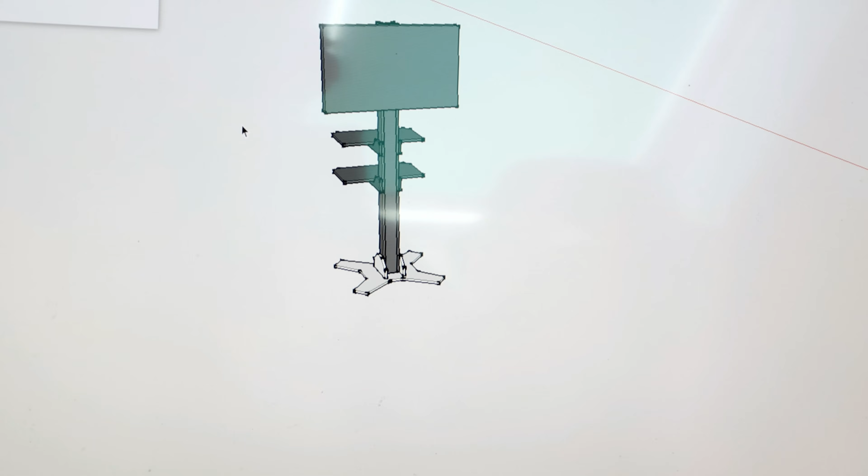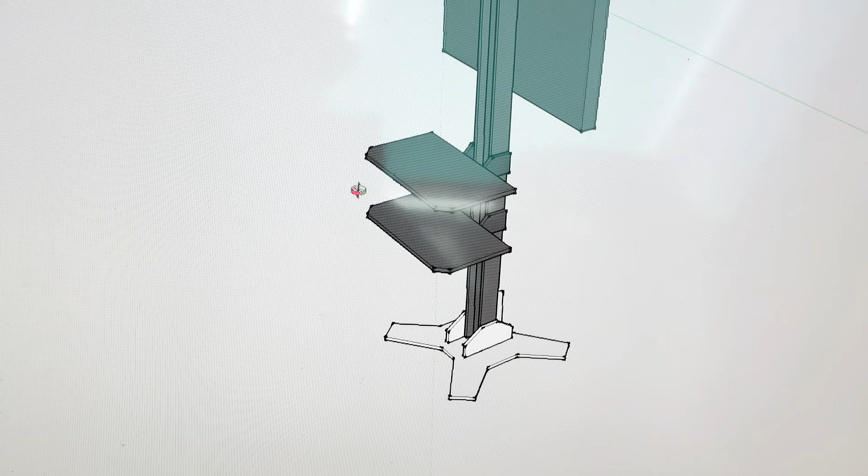Yesterday I was up until very late to get this finished. This is my sketch for the TV stand, and as you can see, I have a base plate that is not completely square because I wanted a bit more features on it. Then it progresses up into this large stand, or pole, where the TV is mounted on top, raised above the track at a good height, and behind it there are 2 shelves: the top one for a laptop, and the second one for the control unit for the slot car track, including the power supply, so it's easy access to changing the voltage on the track and getting access to all of the wires.

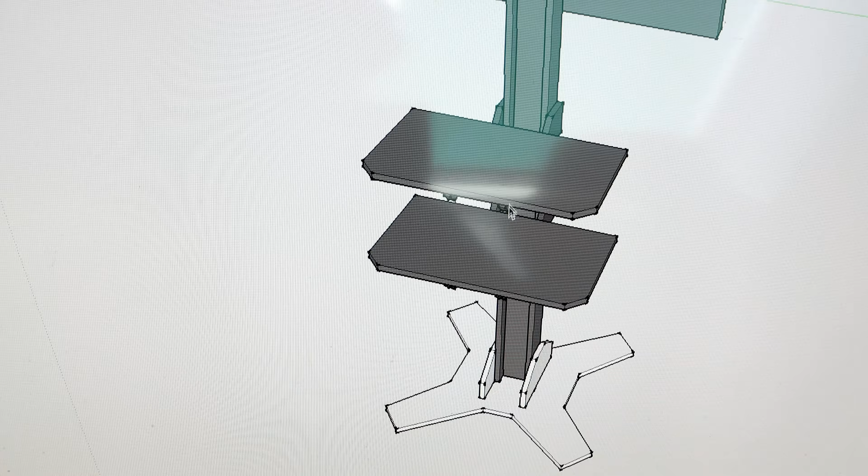All wires can be run down through this pole here in the middle and then down below, and I'm probably going to make a hole in here so I can run them out in front too. So that's the look of it, the general idea.

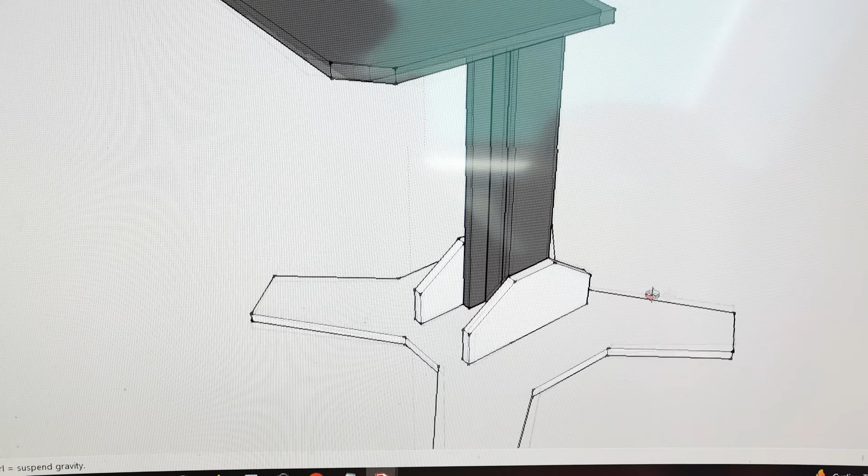I think it might be a bit too tall on this design, but this area here is going to be covered up so you can't see it, so it will be hidden. It will look a bit better. I'm going to do something like this, a small cover plate here.

I will probably leave the hole below it, the hole right there, because that way I can run wires out this way, and the same here. So the wires here will go in front or down below the track.

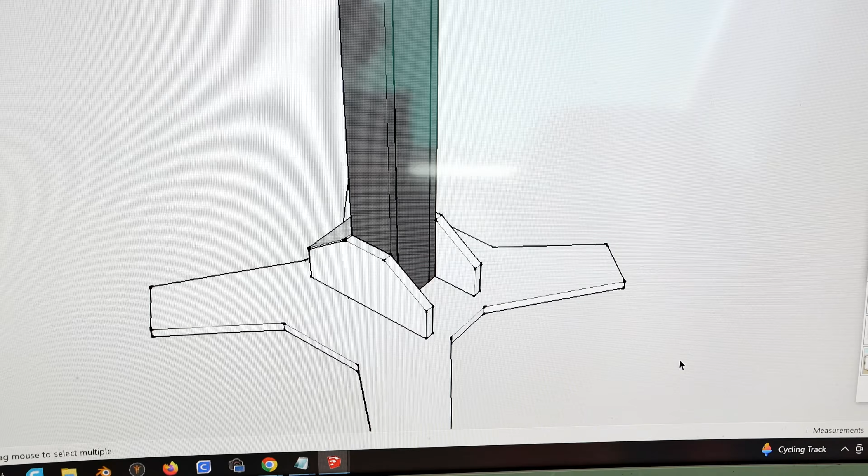So that will actually be pretty cool, that the wires could run all the way down this one, and then out through a hole in the bottom, and then out here, so they can get to the track as unnoticed as possible. So let's get this built.

It's going quite nicely with the TV stand, and sorry for the poor light in here. It is getting very dark outside. I think there is a storm coming, and I have no artificial light in this room, so I am relying on the sun. So it doesn't get any better than this, so nothing to do about it anyways.

But the TV stand is right over there behind, and right now it's just sort of like a pillar you can attach a television to. We have the bottom down here.

I am going to do a bit more work on that to make it look better, and then it's going up on some legs, just some very short ones that will keep it on the floor but raise it a bit. So I still need to drill some holes in it so I can run wires through, and I'm going to make those shelves.

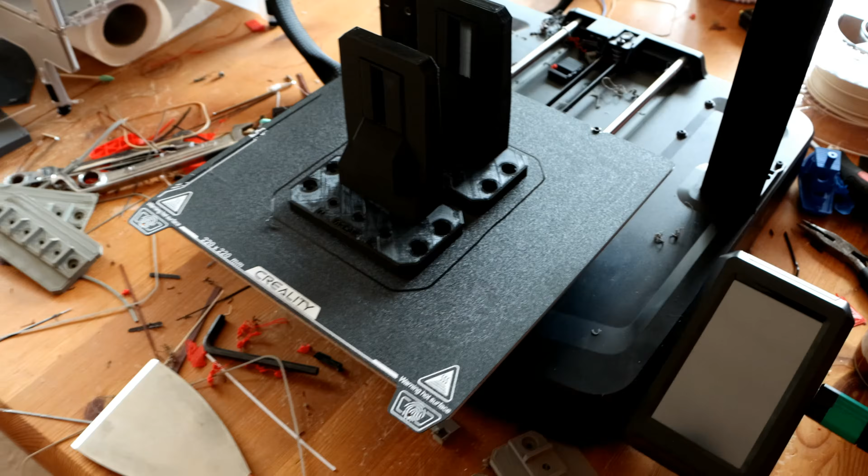Before I went to bed yesterday, I started this 3D printer so it could get these printed by today. This is the mounts for the controllers, and they're going to be located on the side of the track. Luckily the printer hasn't made any fails or flaws here, so they look just perfect.

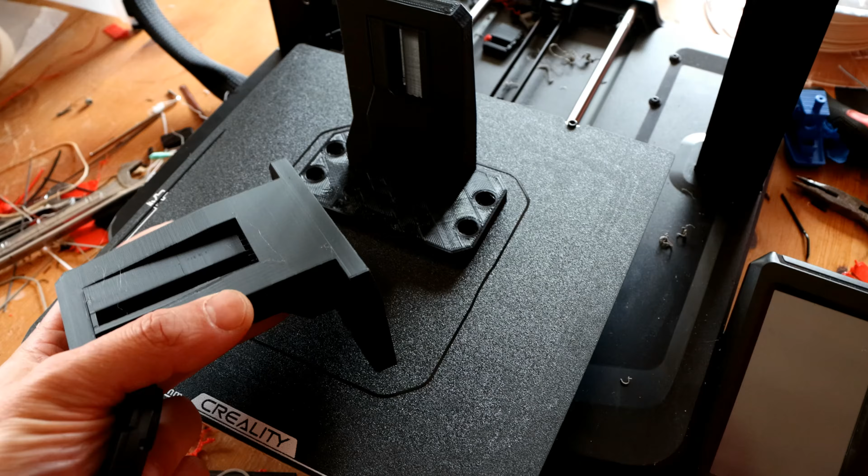So this will be popped out, and then we can install the controller here, and it will be connected through these holes. Yeah, I'll run bolts through them like I did with the control box. And this is mounting holes for screws.

I'm working on connecting all of the wires now, and I have these that are for holding the controller, so they can just fit right in here. And if we take a look at this one, we can see that the wires will be connected behind it and then run through a hole in the track here, so everything will be hidden.

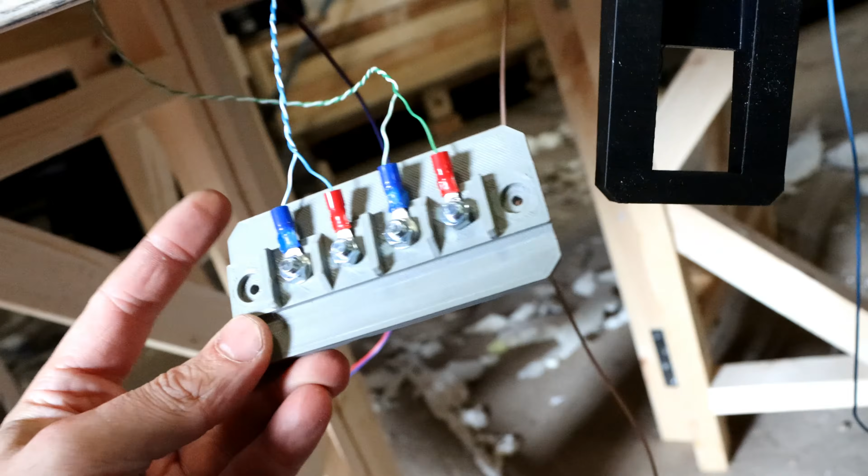Behind I have these panels here. This is for the sensors, and I can just run a couple of extension wires from these two over to the control box. This makes it a lot easier just setting this track up, as these ones will be installed up here under the track.

I'm also going to make some markers that say what this is, that this is for the lane sensors, for lane 1 and lane 2 over here. So that's basically what I'm working at right now, running these wires.

When I have attached all of the wires for the power there and the controllers, it should be possible to test the track and see if the cars can run using the controller. So yeah, let's just get over here behind it.

Because I have the setup here with the TV stand, you can see we have the laptop here, and we have the power supply down there, and the control unit for the track. So all of the wires I'm connecting there will have extension wires running below the track to this one.

That means I can use this stand for other tracks too, so I can just move that around and set it up with another track, which is quite helpful, as I'm also working on a large circuit of Circuit de Catalunya in Spain, a Formula 1 track. If I could save myself from having to build another TV stand, computer stand and control box, that would be great. Then I can focus on just making the tracks.

But let me get these wires finished. It's about 4 o'clock and I have gotten both the controllers and the sensors and the light bridge attached, including the computer over there, which I've just turned around so you can see what's on it.

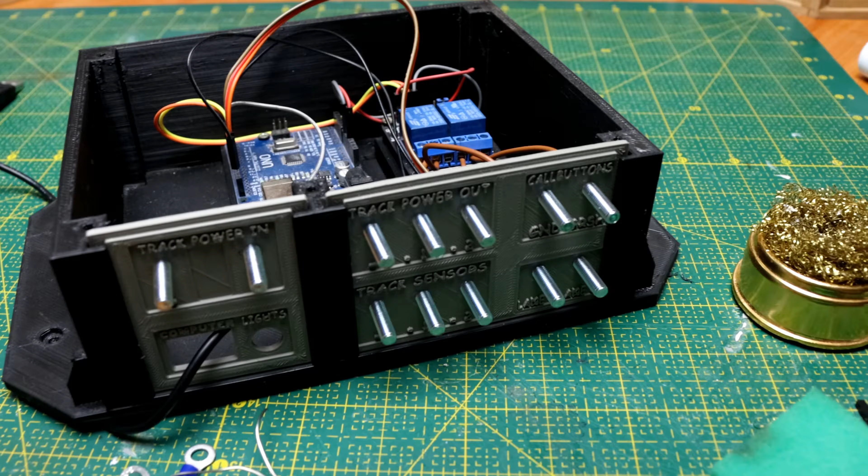I'm sitting here with the control box for the slot car track, and I'm using an Arduino Uno connected with a couple of relays, and then I have run all of the wires out here to these bolts I am using as connectors. This is a very cheap and reliable way of connecting controllers, sensors and so on to a slot car track.

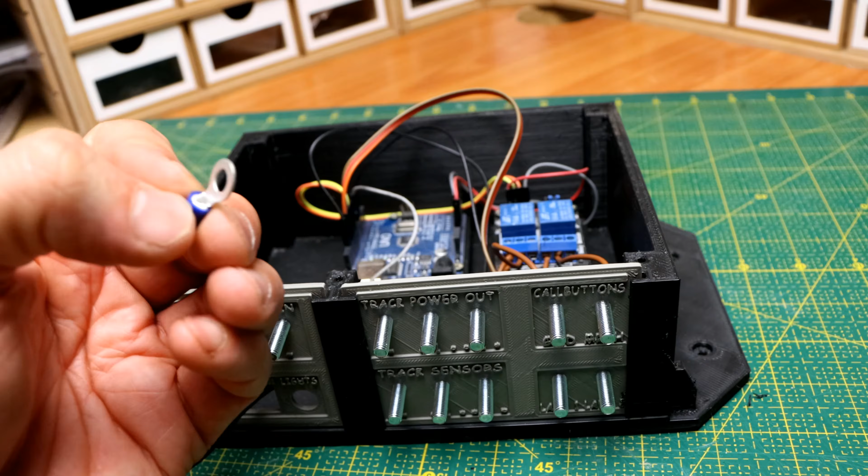I don't know what they're called in English, but I use these, and you can simply run a wire in there and then use a tool to tighten it so the wire stays in place, and it's very fast and it's reliable.

So when the wire is connected here, if I'm going to connect the power to the track, I'm just going to place this here and then use a nut and turn it around until it's tight, and this works very well. I could have used some shorter bolts, but one of the advantages here is that you are able to connect several wires to the same connector.

So this is how I built the control. The box is 3D printed, and the features here are, I have made these panels so they are loose, so I can change them if I come up with a better design.

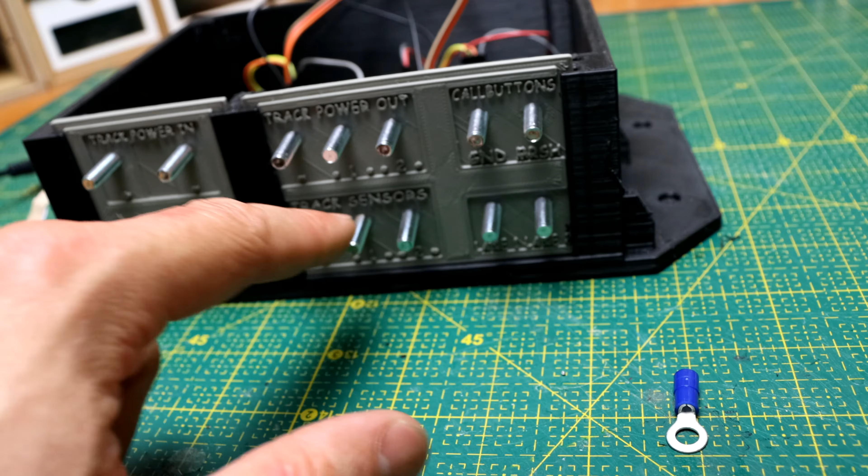So here we have the track power in, we have the track power out for the 2 lanes, and this is just the ground. Then I have call buttons for marshal and for 2 lanes for driver 1 and 2. We have the track sensors, the ground, and we have sensor 1 and sensor 2.

And in here there will be a special piece that will prevent the wire from being pulled, something that will prevent people from pulling hard on the wire and damaging the Arduino behind it. And that hole is for the starting lights if I decide to make those, but I can't manage to do that in just 7 days or with the time I have left. So that was just a quick presentation of the controls here.

I have just set up so we can do sort of like a maiden race and see if everything works as it should. The light bridge operational, the controllers are operational. I haven't cleaned the track yet, so that might make a difference, but the sensors are connected, everything should be in order, but I haven't tested it yet.

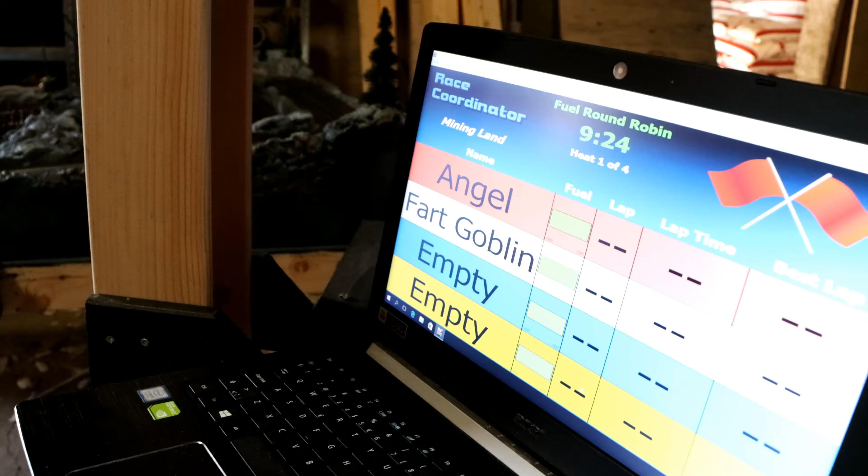We have the software over here, Race Coordinator, running as it should. I haven't done anything with the start settings of the software, so it's just a basic test to see if it can count laps and so on.

So I haven't got any call buttons yet, they will be attached soon. The control unit down there has capacity for them, so I'm going to attach them very soon. But up here we have fuel, we have laps, lap time and best lap. And I'm just going to see if everything works.

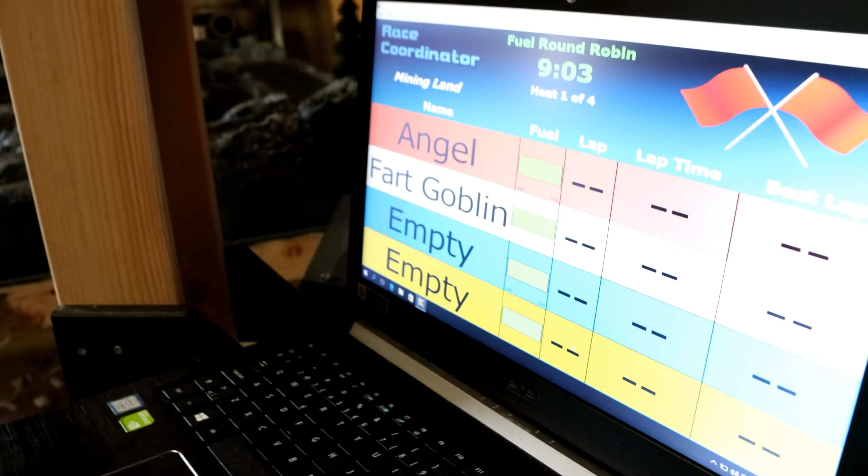So I'm going to place the camera and drive a couple of laps on both lanes just to see if everything is in order. I don't know if it's possible to see the screen here on the camera. Hopefully it is. So let's do some laps, see if everything works. I'll have to turn on the machine manually, hit the space bar as I haven't got a call button yet.

And we'll just listen one lap at a time. Go. That was the wrong controller, but we can see that it actually counted the lap over there, so that seems fine. I'm just being a bit careful here not to crash the car, because that would really ruin the video, so I'm not going to bring back a damaged car or anything.

It counted the lap, everything seems to be in order. I made a lap time of 18 seconds and it burned some fuel. So let's just try to refuel when we get back here to the start line. See if I can hit it. Yeah, perfect, so it can refuel and everything.

Let's test the other lane, see if that goes as well. That actually feels like it runs a bit smoother, but as I've said before, I need to clean this track before doing any racing on it. So let's just take a lap. It counted the first lap, I can see on the screen over there.

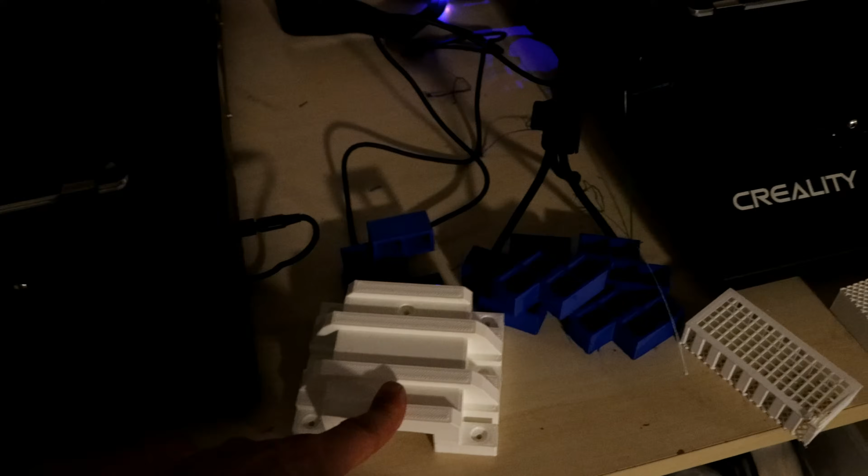So all of the edges have been painted black, and the TV stand over here has also been painted black. It's actually ready, I just need to mount the 2 shelves, and I also ended up staying really late designing a system to do that. That's what the 3D printer over here is working on right now, printing blocks where the shelf can slide into, meaning I can remove them if they aren't going to be used. So let's get on with connecting all of this.

Finally gotten to some of the last parts of this project, because it is beginning to take its toll. I am really tired. Been working a lot on this slot car track, and it's looking incredible, but I'm looking forward to just taking a small break from it.

So I'm going to make the call buttons that can activate the yellow flag on the track or just stop the race. I'm going to make 3: one for each player or driver so they can initiate a yellow flag, and one for a marshal so he can stop the race if necessary.

And it's actually very simple. I have 3D printed these parts, they're available on my Patreon if anyone's interested. Generally we have the top here, fits down here, and then you attach one of these common push buttons here and solder in a wire. I've made some 5 meter length wires, these will go into my control box, and the wire runs out through this hole in the bottom of the switcher, the handle you can press.

So when you are using it, you stand like this with this in your left hand and the controller in the right hand, and if you fall off the track, you just hit the button up here, the red one right down there, and that will stop the race. Pretty simple. So I'm going to make 3 of these, and then attach them to the track tomorrow. Well, that's it.

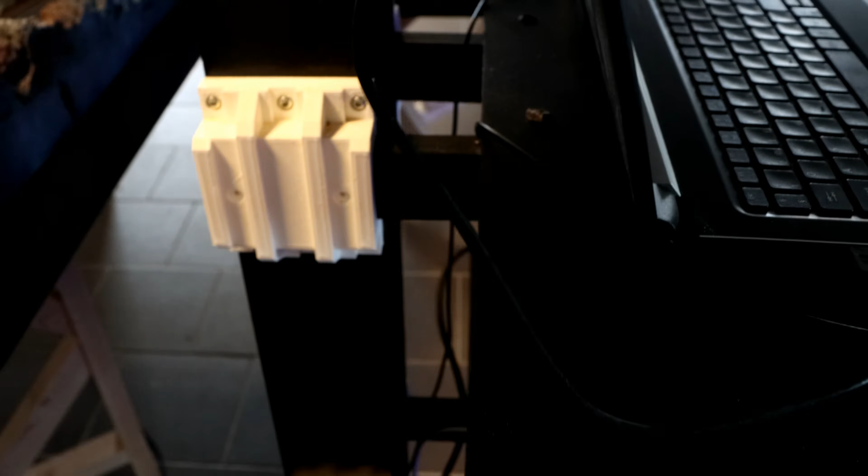You can see in some of my other displays over here, they have 3 screens, and I usually use that for displaying event results, like championship results, on one screen, and the other screen shows who's going to drive next. I didn't think this was necessary for this one, but I might upgrade this display with that same screen setup.

So the track looks pretty good right now, but I still need to add a bit of fences, and I just experimented a bit with it here.

The only problem is that I painted up a lot of these fences. I have them right over here, but unfortunately I ran out of the spray paint I've been using, and I've ordered some but it hasn't arrived yet. So today I'm just going to focus on adding them at the absolutely most necessary places, and I'm probably going to add a bunch of trees here to prevent the car from falling off that way. I'll use the trees sort of like a fence, but I still need to make it look good. I'm also going to add some bushes and plants, a bit of flowers, just a tiny bit, not overdo it, because I actually think this looks very nice as it is. So let's get those fences attached.